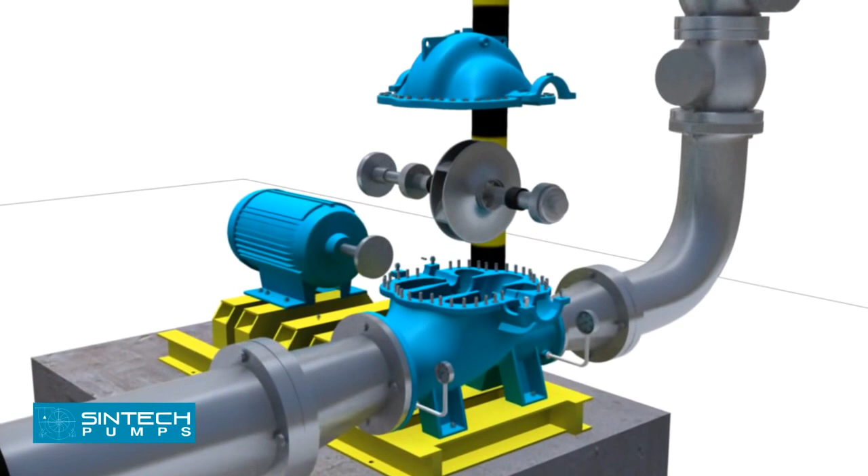When properly installed and given reasonable care and maintenance, centrifugal pumps should operate satisfactorily for a long period of time. The axially split casing design allows removal of the impeller and bearing housing assembly without disturbing suction and discharge piping.

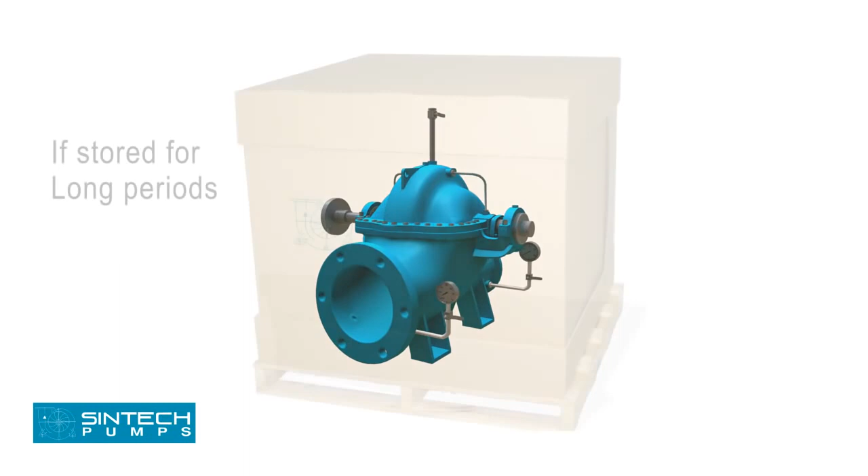Storage and protection. All pumps are shop tested and ready for operation when delivered. If equipment is to be stored for long periods of time, 6 months or more, it should be kept in a clean, dry area, and the following precautions should be taken to ensure that the equipment remains in good condition.

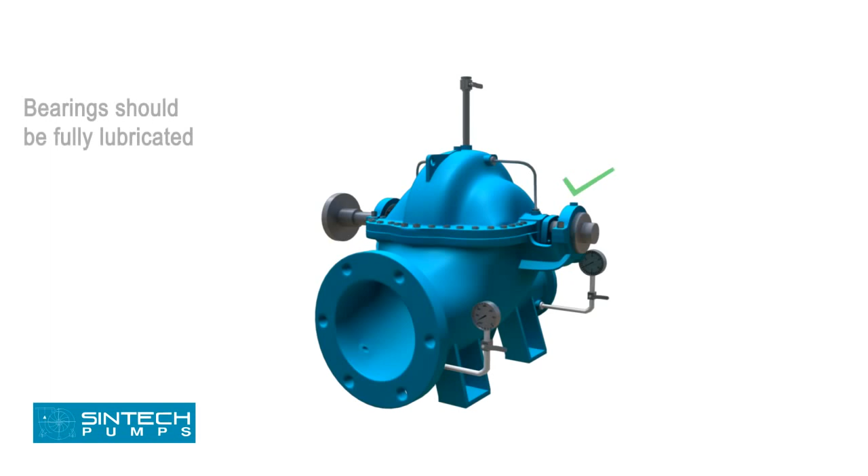Be sure that the bearings are fully lubricated. The shaft should be rotated 10 to 15 revolutions by hand periodically in order to spread the lubricant over all the bearing surfaces. Suitable intervals are from 1 to 3 months.

Installation. The pump should be located as close as possible to the liquid supply so that the suction line is short and direct. Location should require a minimum of elbows and fittings in the discharge line.

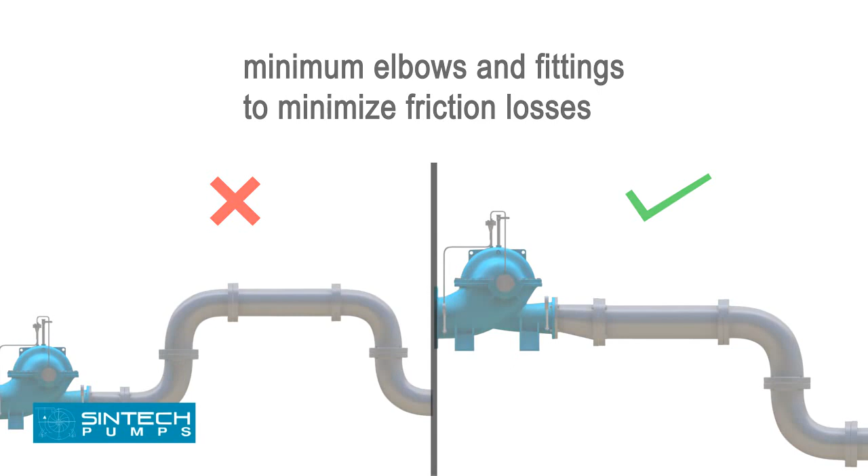Before installing the pump, ensure that the foundation on which the pump will be placed is prepared well. It has to be sufficiently substantial enough to take the weight of the pump and absorb any possible vibrations from it. The foundation has to be absolutely straight, without any inclination or tilting on any side.

The foundation bolt of proper size should be embedded in the concrete and base plate tightened, ensuring that it is level in all directions.

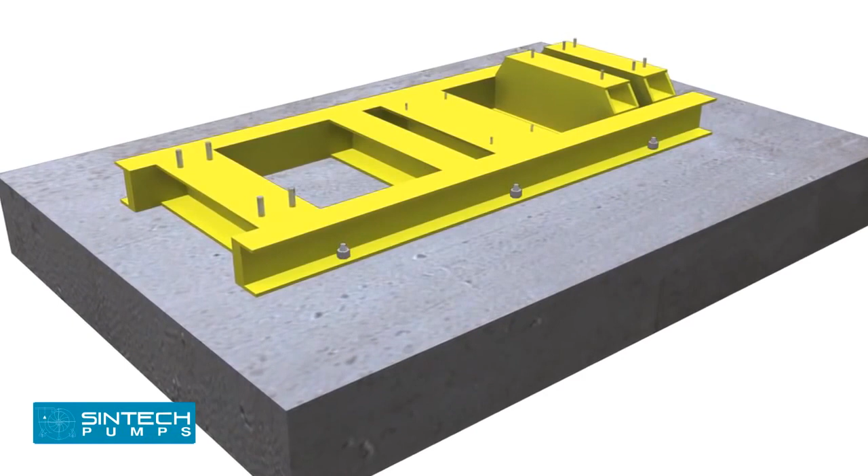Piping associated with the pump must be anchored and supported independently of the pump and should never put any strain on the pump casing. When the pipes are not supported, their weight is borne by the pump casing and may cause them to crack or deflect.

It is important that the connections be carefully aligned axially, angularly, and in length.

Suction piping in case of static suction lift condition, negative suction. The piping run and the connection fittings should be properly aligned and supported separately. The elbow should be of long radius type.

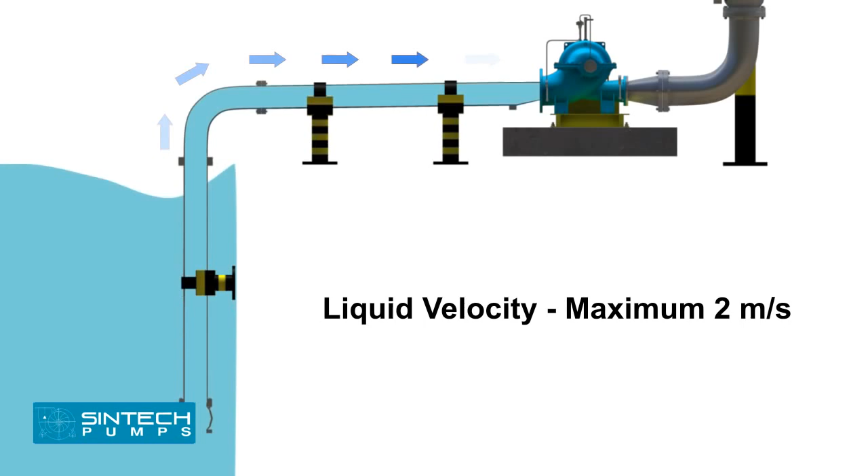All suction piping must be airtight. The suction pipe should be sized to ensure the liquid velocity of not more than 2 meters per second. All suction pipes should have a continuous rise to the pump suction inlet. 6 mm per 100 mm slope is recommended.

The recommended suction pipe size should be at least one commercial size larger than the opening of the pump inlet. No isolation valve is recommended. There should be a tapping provided for installing a vacuum gauge in the suction line.

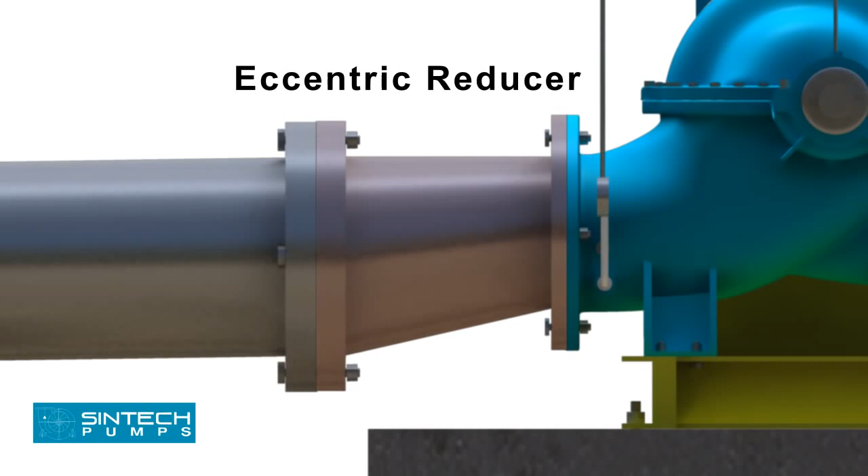The reducer joining the straight length of the pipe in the pump line should be an eccentric reducer, with the inclined side of the reducer as the bottom side. The straight length of the pipe after the eccentric reducer should be 2 times the pipe diameter.

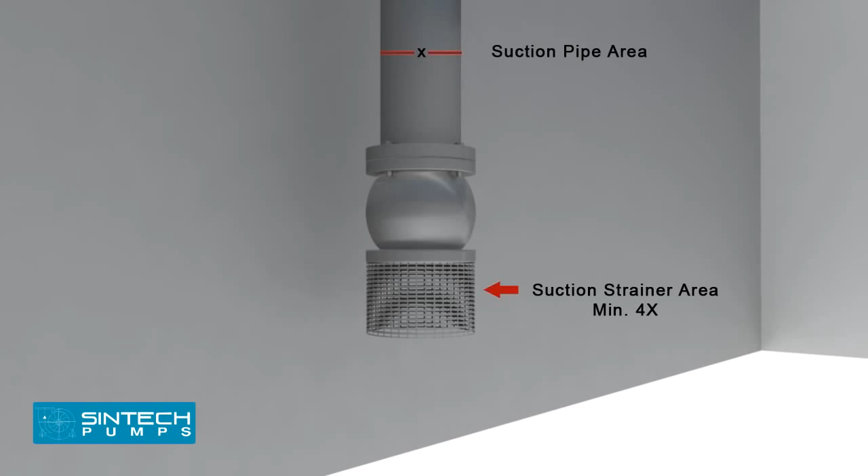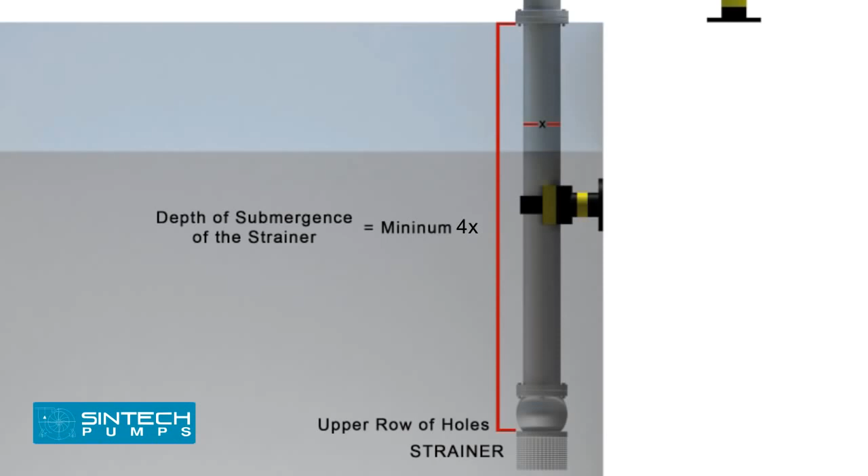The suction strainer must be at least 4 times the suction pipe area, and the mesh size should screen out solid particles that could clog the impeller. The minimum depth of submergence of the strainer should be at least 4 times the pipe diameter, measured from the upper row of holes of the strainer.

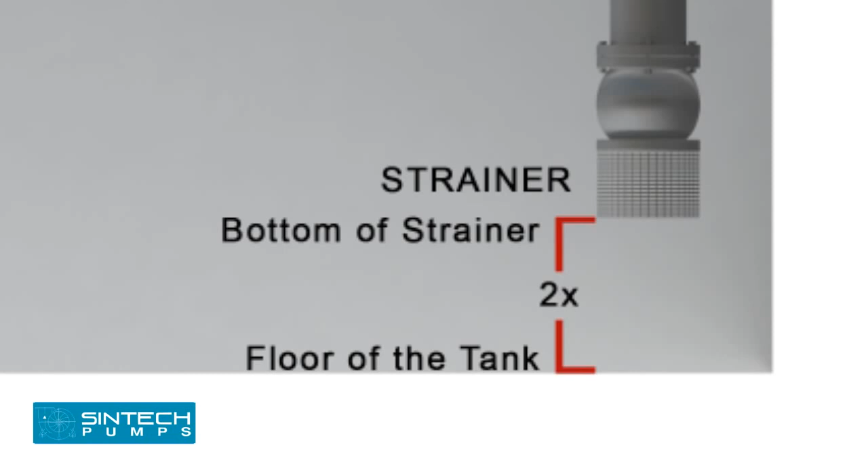The distance between the bottom of the strainer and the floor of the tank should be considered as 2 times the pipe diameter. A stream of liquid falling into the sump near the intake pipe will churn air into the liquid.

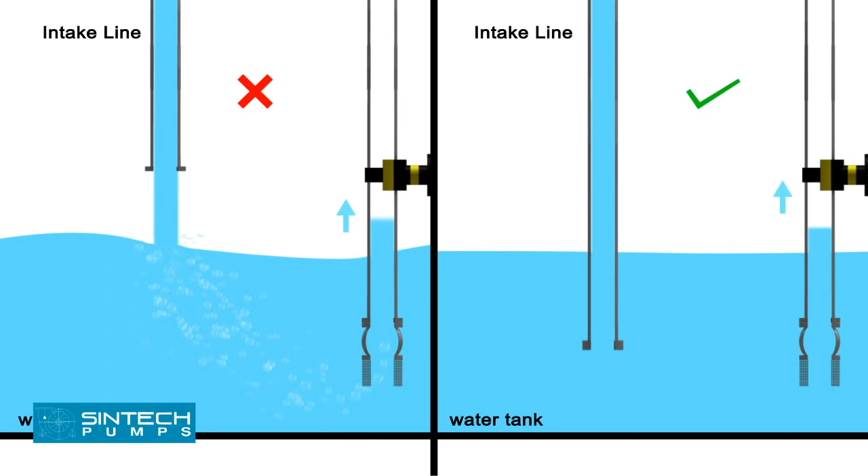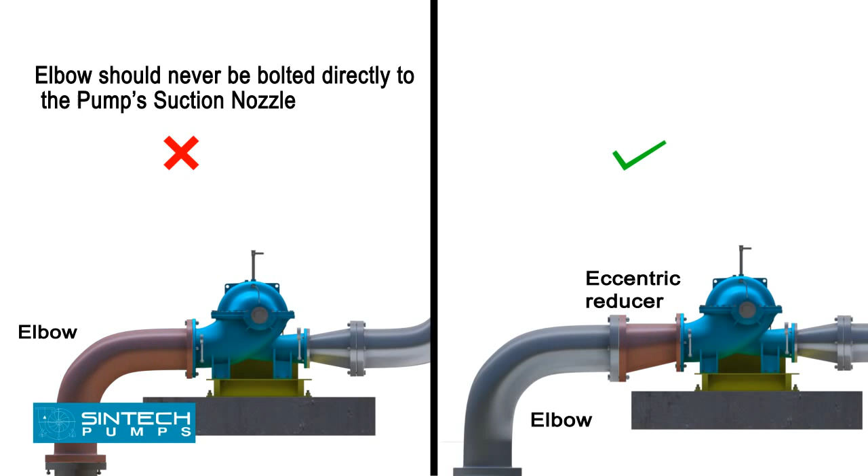The supply line should extend down into the liquid. A short elbow should never be bolted directly to the pump's suction nozzle. The disturbance in the flow caused by the sharp bend so near the pump inlet may result in noisy operation, loss in efficiency and capacity, and heavy end thrust.

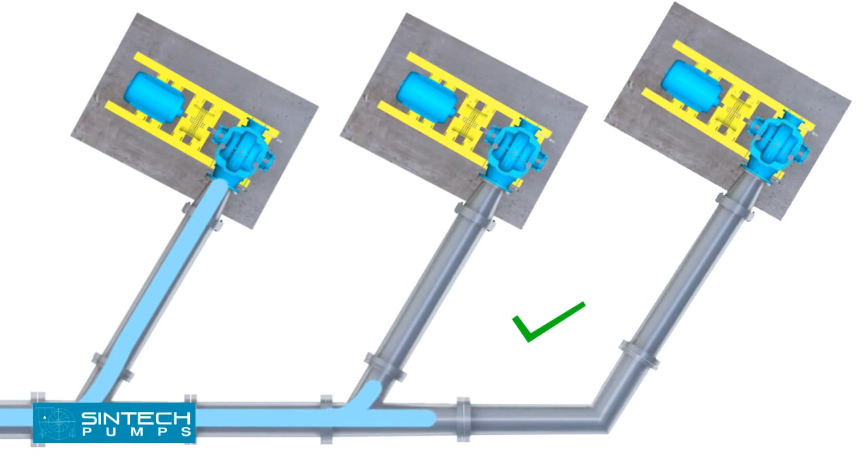If separate suction lines cannot be used for each pump, then a tapering header with Y branches should be used. A straight branch header should never be used.

Suction piping in case of flooded suction condition. Positive suction.

In case the water is being supplied to the suction through gravity, for example an overhead tank, a slightly different setup is needed.

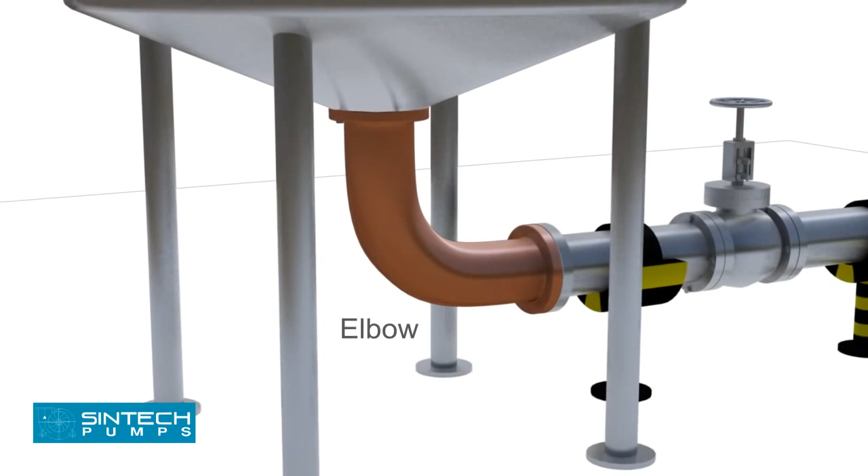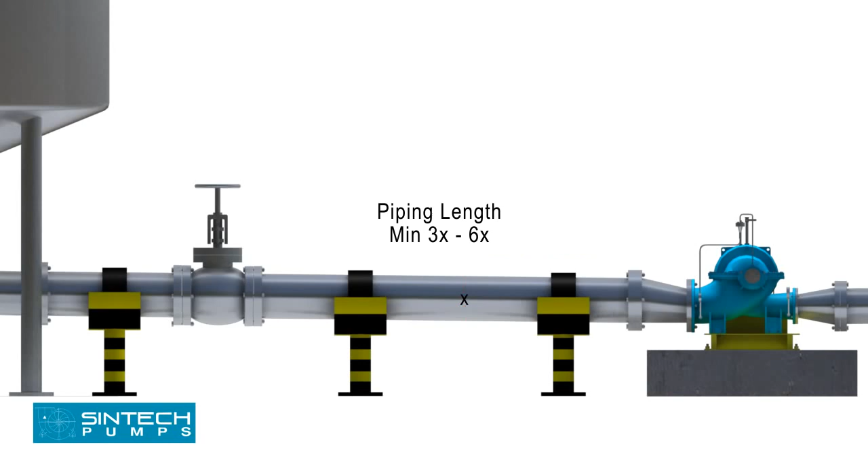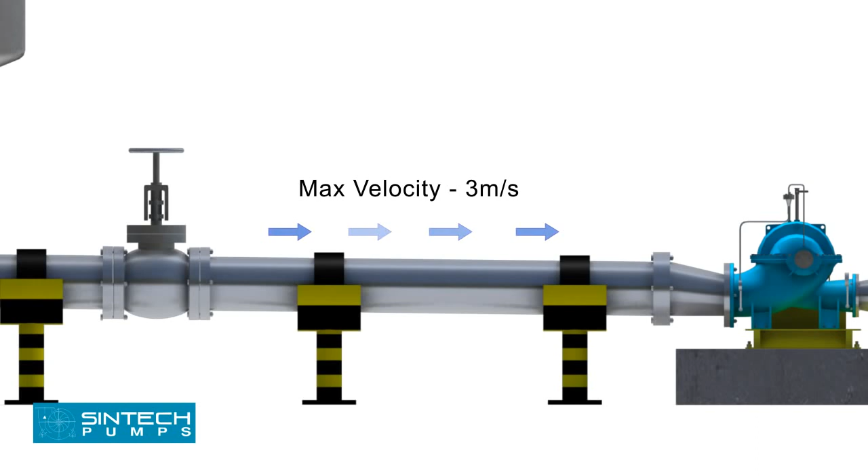The elbow should be of standard type or of the long radius type. Isolation valve should be provided in the suction line. The pipe supplying from the tank into the pump should have a descending inclination. The straight run of piping leading to the pump suction nozzle should be at least 3 to 6 times the diameter of the pipe from the upstream elbow. The suction pipe should be sized to ensure a liquid velocity of not more than 3 meters per second.

There should be a tapping provided for installing a pressure gauge in the suction line. The reducer joining the straight length of pipe in the pump line should be an eccentric reducer with the inclined side of the reducer as the top side.

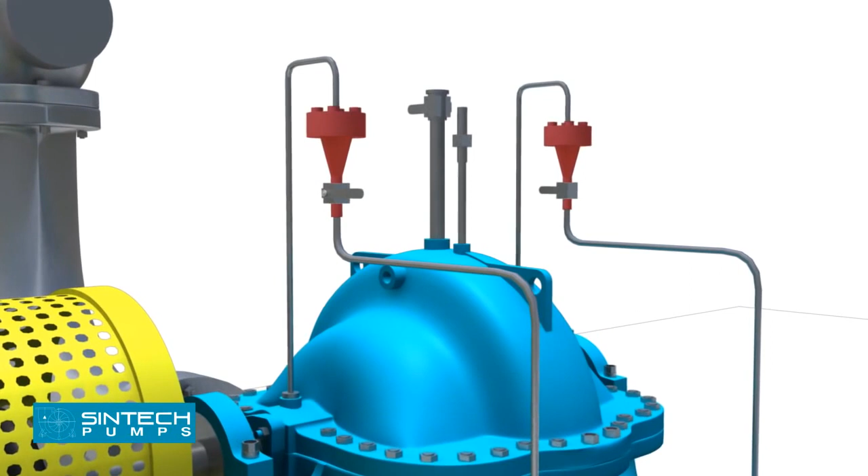Stuffing box seal connections are usually made from the top of the pump casing. If the liquid being pumped is unsuitable for sealing, it is preferable to bring fresh, cool water to the seal connections from an outside source. Centrifugal separators or other filters may be used to remove abrasive particles from the liquid being pumped if an outside source is not available.

Description of the discharge pipe. The piping run and connection fittings should be properly aligned and supported separately to reduce strain on the pump casing. There should be a pressure tapping as close to the pump outlet and before the isolation valve as possible to measure the pump shutoff head.

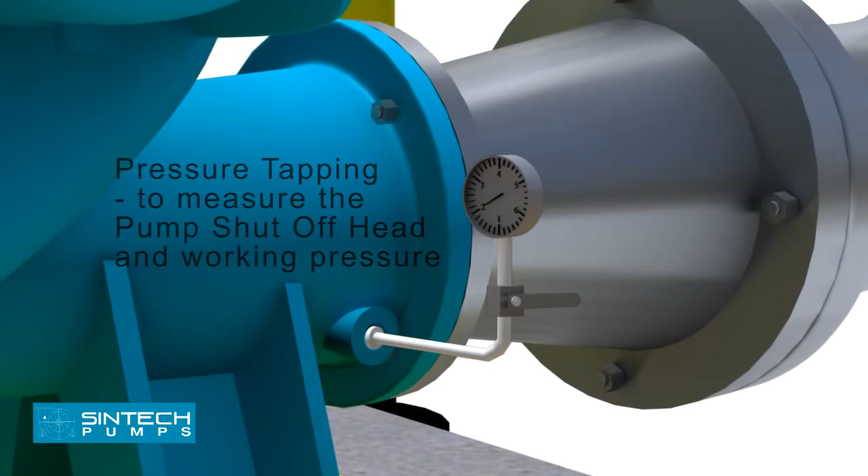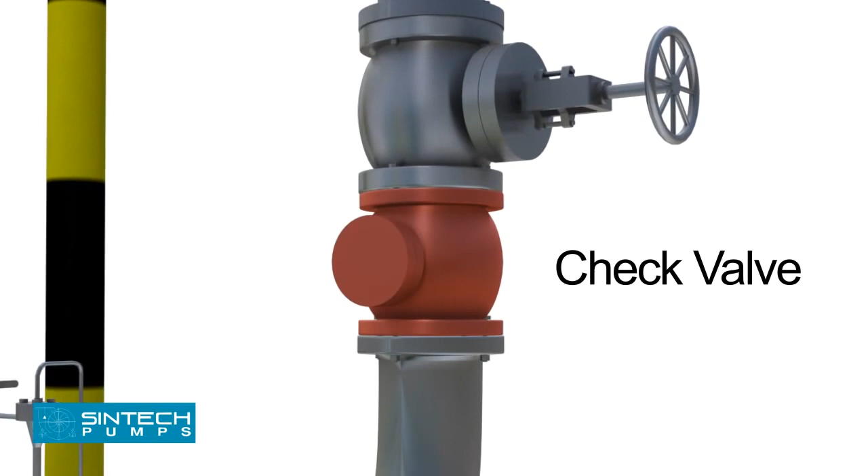Concentric reducers are installed in the discharge pipe to minimize friction losses. The check valve used in the discharge should be of non-slam type to prevent reverse flow and protect the pump from excessive back pressure. The isolation valve is provided downstream of the check valve so that these can be taken up for maintenance, priming and starting whenever required.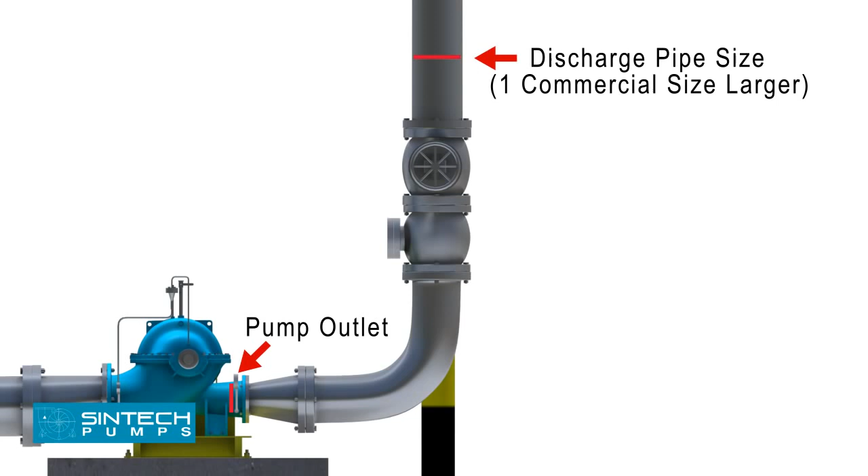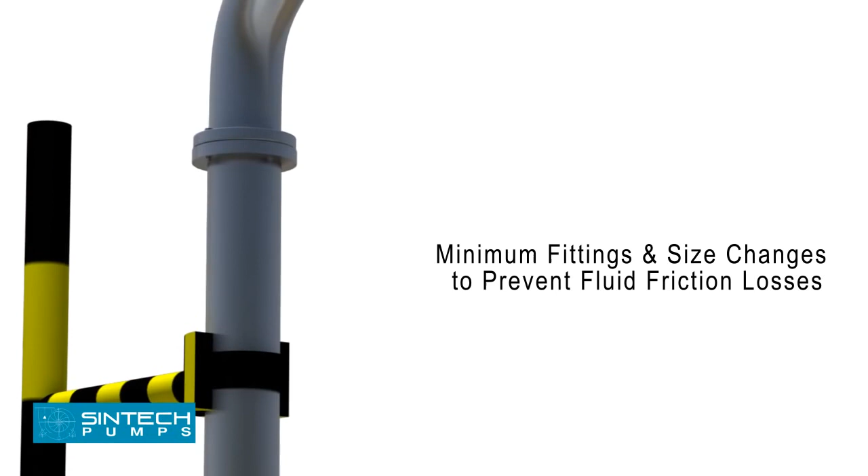The recommended discharge pipe size should be at least one commercial size larger than the opening of the pump outlet. The number of fittings and size changes should be minimum to prevent fluid friction losses. Expansion joints may be used only after a careful piping analysis, especially when the discharge pressures are on the higher side.

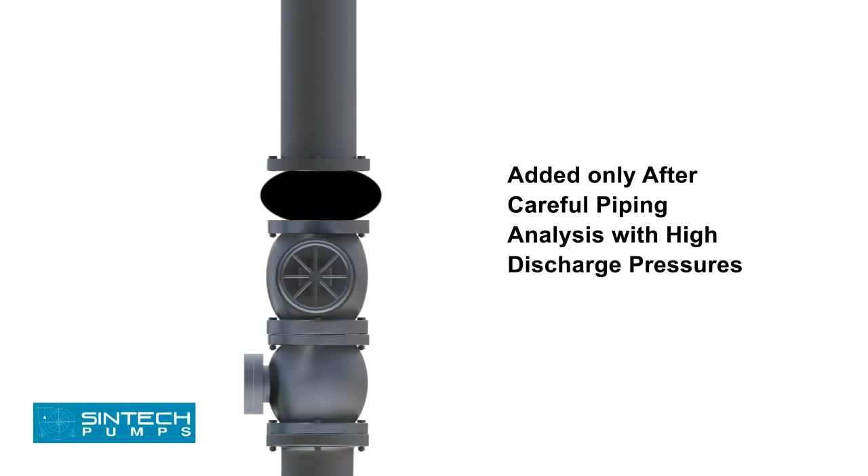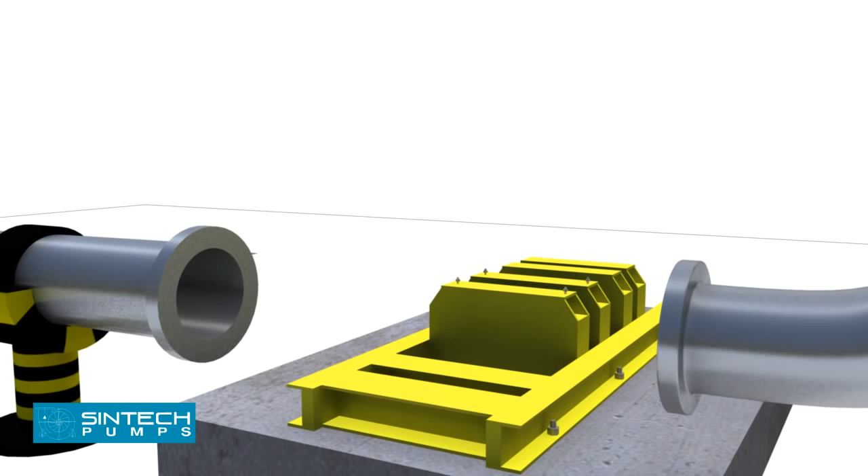Installation of pump and prime mover. The pump and motor unit needs to be fitted firmly onto the base frame using nuts and bolts before fitting in any pipes. It is essential to confirm the distance between the shaft ends.

In the subsequent step, the pump and motor are aligned to the final tolerance using a reverse dial gauge or a laser alignment tool.

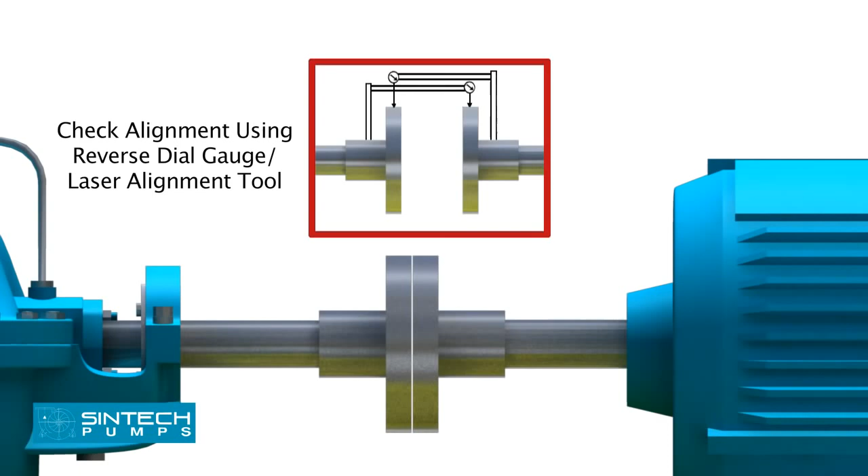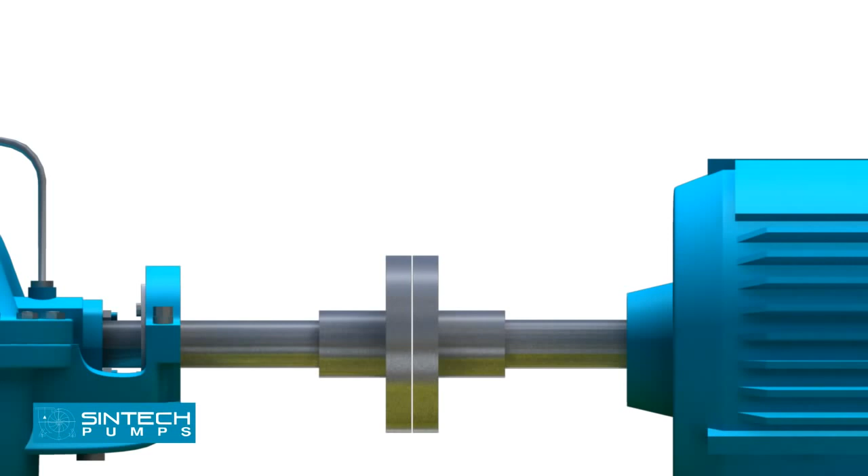After the alignment is completed, the piping associated with the pump should be bolted. Once this is completed, the alignment should be rechecked and similar readings should be obtained. If this is not the case, then the piping should be investigated and suitable corrections should be made. If left unattended, it can cause stress on the pump casing.

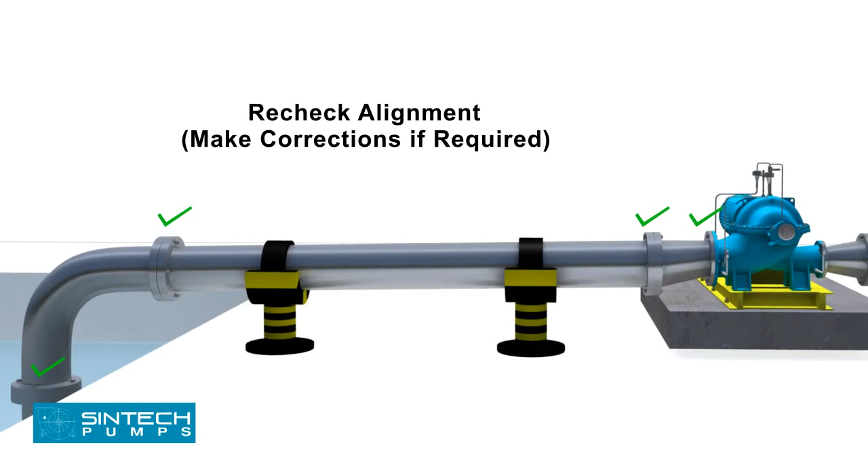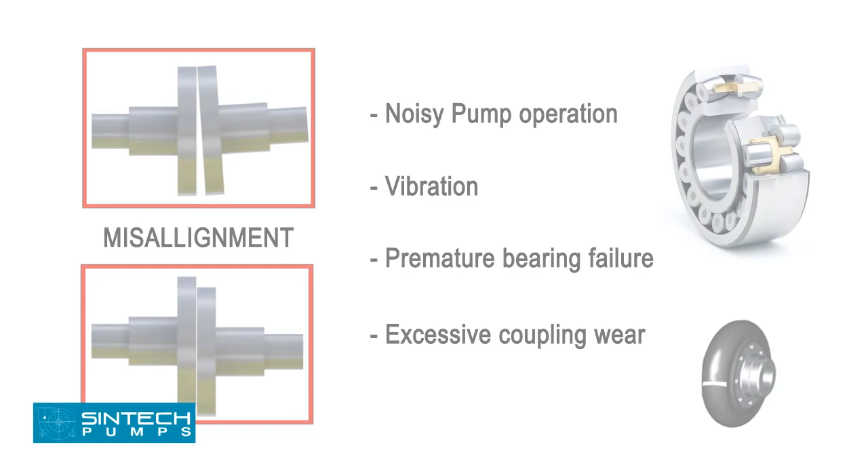Misalignment may be the cause of noisy pump operation, vibration, premature bearing failure, or excessive coupling wear. Once the pump and motor have been coupled, test the movement manually by rotating it by hand to see if it is rotating smoothly.

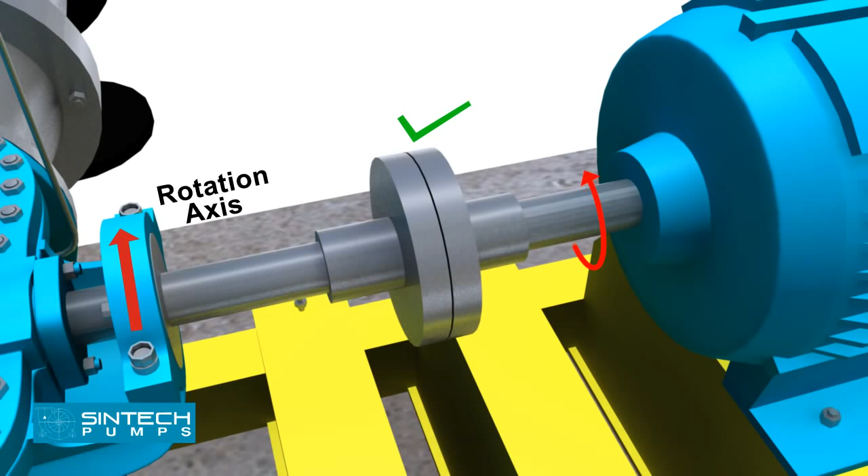Operation. Before bolting the coupling halves together, check the drive rotation to see that it matches the pump rotation. Starting.

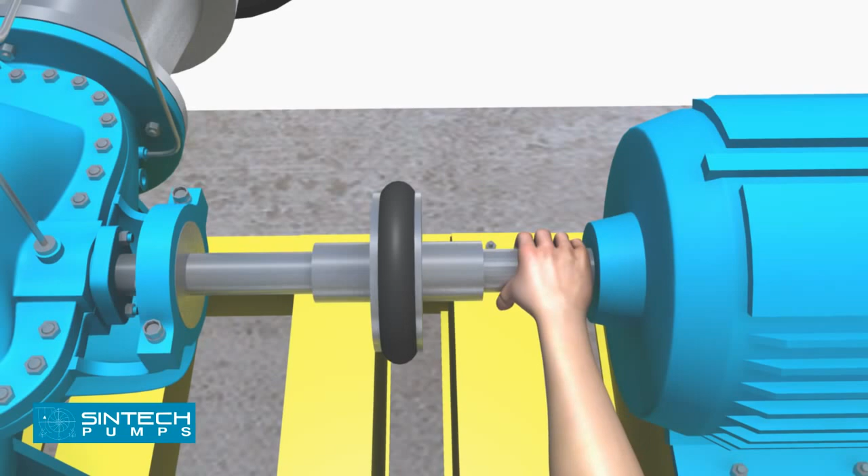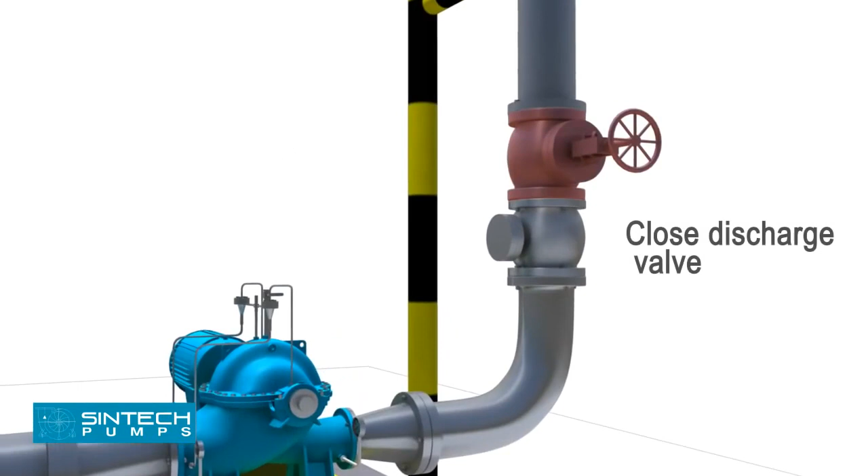When possible, turn the pump shaft by hand to ensure that the parts do not bind. Check the bearing lubricant. Open the valve in the pump suction line if fitted. Close the discharge valve. Prime the pump. Open valves in stuffing box seal lines if fitted.

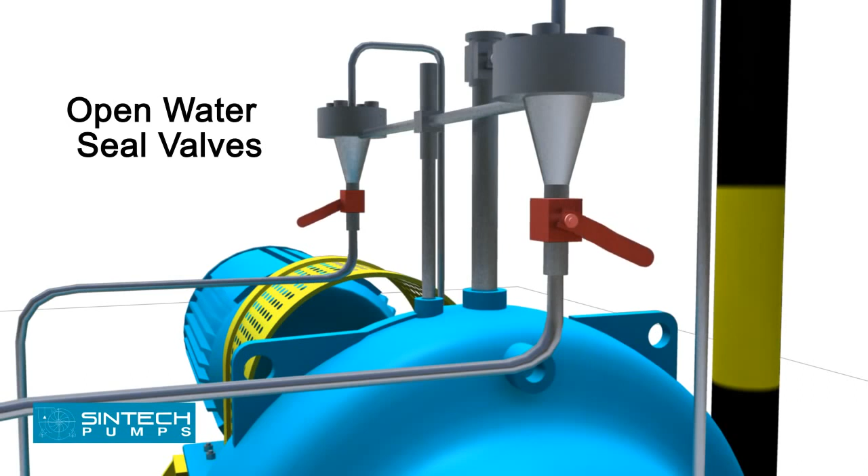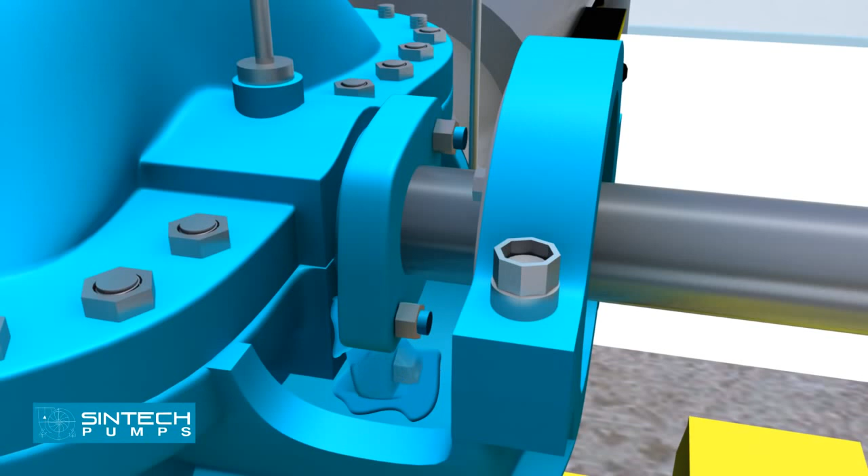Start the driver. Open the discharge valve slowly when the pump is up to speed. Adjust the packing gland until there is a slight leakage from the stuffing box. Mechanical seals need no adjustment. There should be no leakage.

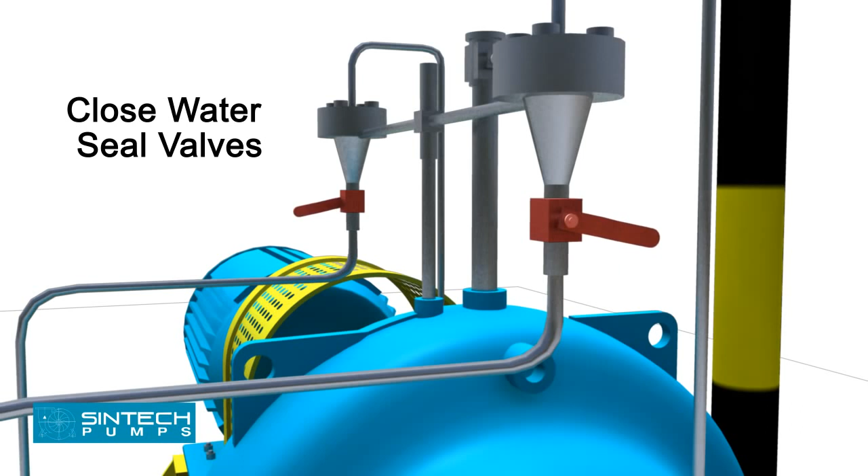Shutdown. The pump may be stopped with the discharge valve open without causing damage. However, in order to prevent water hammer effects, the discharge valve should be closed first. Close the discharge valve. Stop the driver. Close the water seal valves. Close the valve in the pump suction line if fitted. If danger of freezing exists, drain the pump completely.